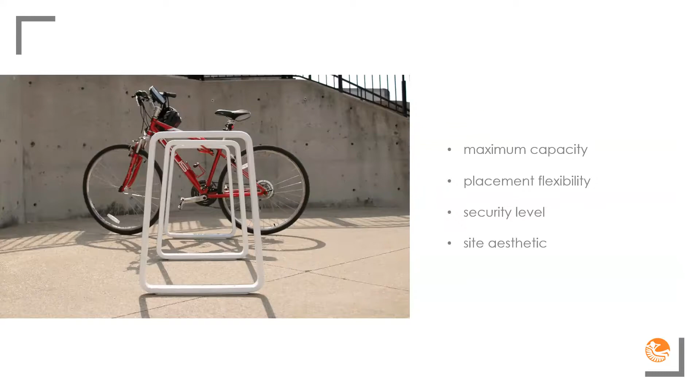Also, sturdy construction is something you're going to want to look at, especially if it's an area where theft or something of that nature is a higher concern. If it's an area where there's people stealing bikes, you might want to consider something that's a little bit more sturdy versus some of the other options. One thing that I would recommend there is installing a bike rack that can be direct buried, that is poured in concrete rather than anchored. It just gives you another level of protection and resistance to actually even breaking that bike rack and then stealing the bike after, which does happen.

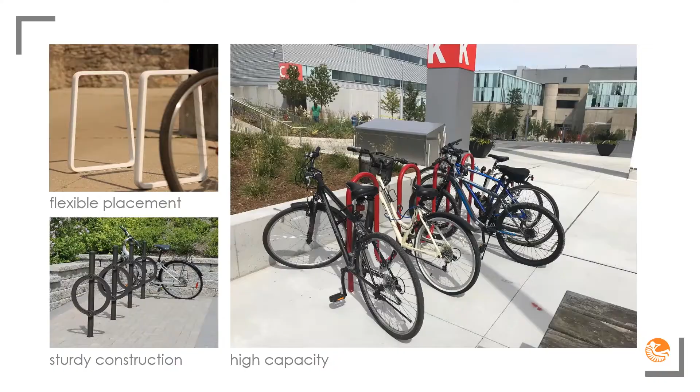So I'm going to look at actually the placements once you've selected your bike rack and you feel that it's one that best fits your needs on your site. One thing that you should always consider even before looking at these guidelines that I'm going to suggest here is you're going to want to look at your local codes. Match them first, because of course it's going to be important to ensure that you meet what they need, because you don't want to go back and change things and update them and have a whole change on site later.

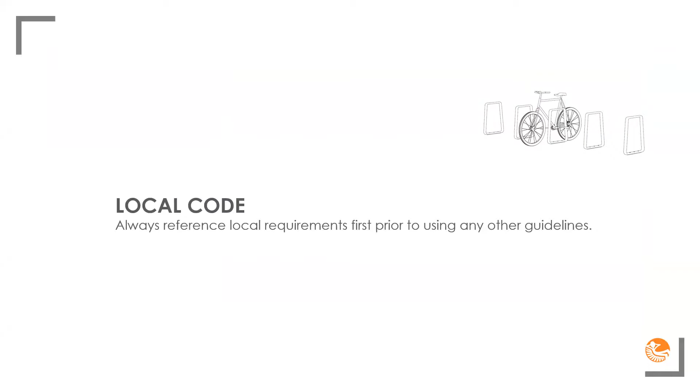One thing to consider is, as mentioned with the sturdy bike racks, theft, but that also is related to location. So if you can consider a spot where there's good lighting, some good traffic, where there's some visibility, it's a really good thing to consider when you're deciding where to place them, maybe by some doors close by, rather than in areas where they're out back or hidden or maybe susceptible where people have some time to fiddle or meddle with the bike racks and then unfortunately steal them.

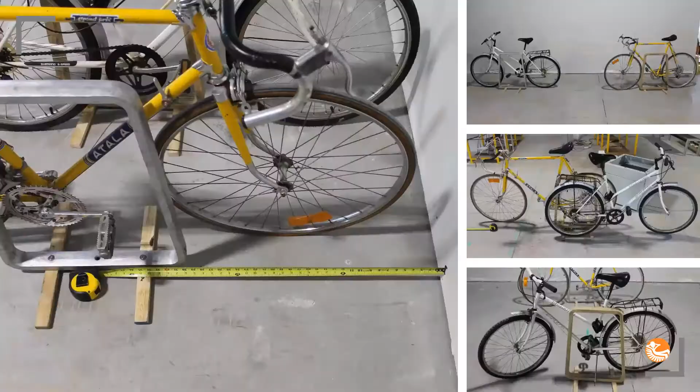So then look at the actual install locations and spacing of the bike racks. I looked at various guides and recommendations that they had. There's different dimensions all over the map in terms of what's suggested. I took all those numbers and kind of compiled them together and thought, well, I'll try those out myself at our shop here. And so I brought in a couple bikes and had some mock-ups done of a bike rack that we recently released. And what I did was just mocked up, imagining myself locking those bikes to those bike racks and imagine myself removing and taking them out just to get a feel for whether there was enough room to, one, maneuver and get to the bike rack, and then two, actually connecting and locking up. So that's what I did here.

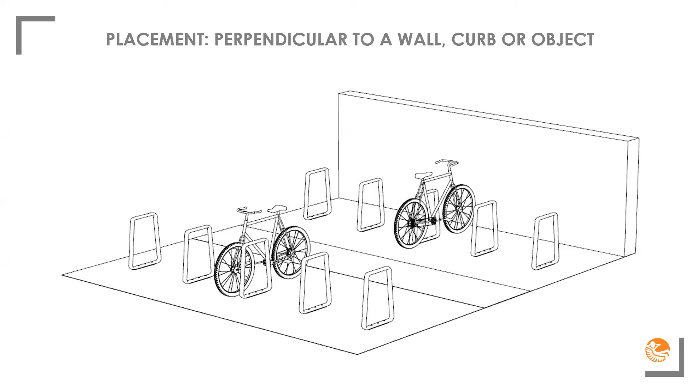And with that, I developed a guide that we can share that has some common scenarios that you could run into when you're looking to actually place your bike rack. So in this case, this is the perpendicular to wall, curb, or object, and that's depicted in this little image here. I'll get into the details here on the next slide. So what I would suggest is keeping each rack itself 36 inches apart. You can apply this to any ring bike rack or two capacity bike rack, really.

You could use this guide for a whole bunch of bike racks that might be available on the market. So that 36-inch gap you want in between gives you good room for parking your bike in place, keeping it 30 inches away from the wall or curb. It allows just enough room for that tire so that it's not overhanging or banging into the wall or other object.

And then if you're going to do two rows in parallel, I would recommend a 108-inch minimum there. That's accounting for a 36-inch gap so that people can walk in between those two rows and get to their bike, and also have enough room to pull their bike in and out of that location.

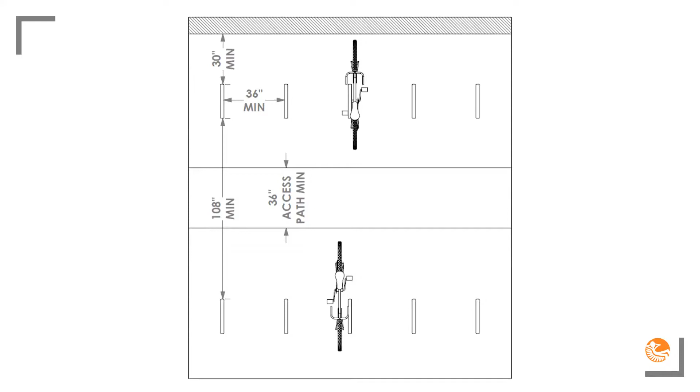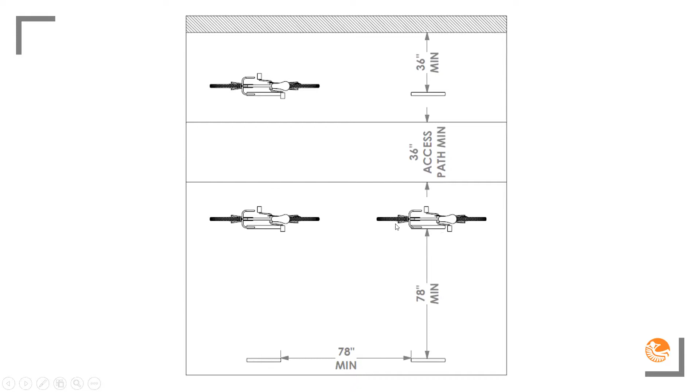And then I'd recommend a little bit more room near that curb or wall, especially if you want to account for people walking in beside their bike there. In the other instance, that would just be accounting for the wheel where people wouldn't actually have to access. So here you need a little bit more room. And then from one bike rack to the next, from edge to edge, it leaves 78 inches. This gives enough room for the full-sized adult bike and then enough room to pull out again.

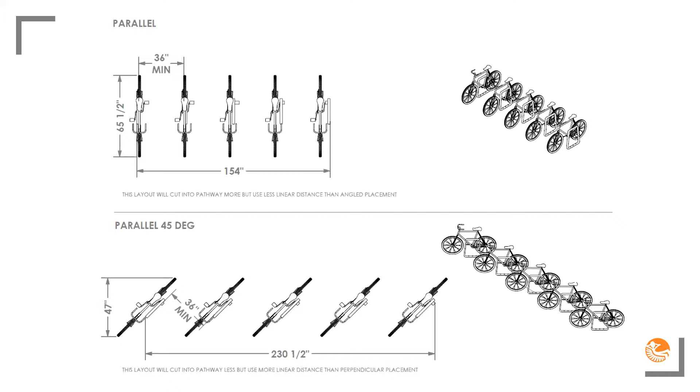But if you're looking at a walkway where you've got limited space, you might consider turning those bike racks on a 45. So you can see in this case that bike that was 65.5 inches would only take up a depth of 47 inches. Now the thing to consider, of course, is that you're now spreading it over a greater linear distance. So that could really depend on whatever is working best for your site. Simply turning it is a little tip for freeing up some space in other areas, whether it be a walkway or pathway.

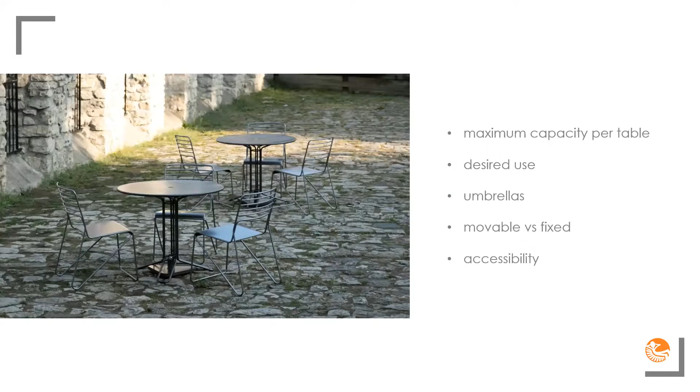So now I'm going to talk about some product function selections of tables and chairs. A few features you'd want to think about: maximum capacity per table, the desired use, umbrellas, a movable versus a fixed option, and accessibility. So when thinking about the desired use, you might want to decide what type of activity is going to happen there. Is it simply an area for cocktails and coffee, or an area where work will be done, where people take out their laptops and papers, or are they sitting down for a full meal?

Another thing you'd want to ask up front is, are umbrellas going to be at this site? Some tables have the option where you can go back later and add that if you can't decide up front, but you'll want to be conscious of that and decide whether that will be required on site.

And then in terms of movability, you'll want to consider whether you want an anchored table or one that can be moved. Chairs that can stack are great for packing away at night. There are certain courtyards and spaces that want to clean up every night or weekly, so chairs that stack could make that a lot easier and simpler for maintenance crews. So that's something you might want to consider as well.

So going back to table size and capacity, for cocktails and coffees, something like a two-person 30-inch table with 2 chairs might be appropriate for that type of setting.

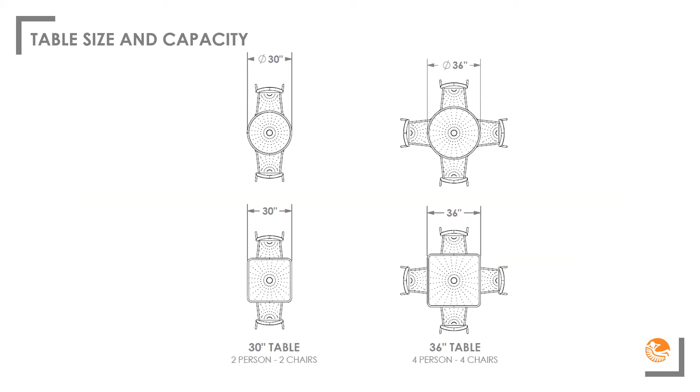Whereas if you're thinking that maybe it's a sit-down meal, you might want to look at the 36 inches where you can actually have 4 people and 4 chairs. Another thing to keep in mind, here we're showing a 30-inch diameter and a 30-inch width. The square tables will afford you a little bit more room in terms of square footage if you're looking at the exact same dimension. If you need more room and you prefer the circular shape, I would then select maybe the next size up to account for a little bit of additional room.

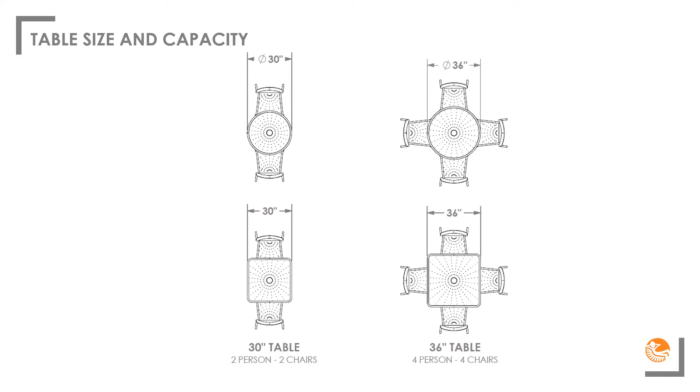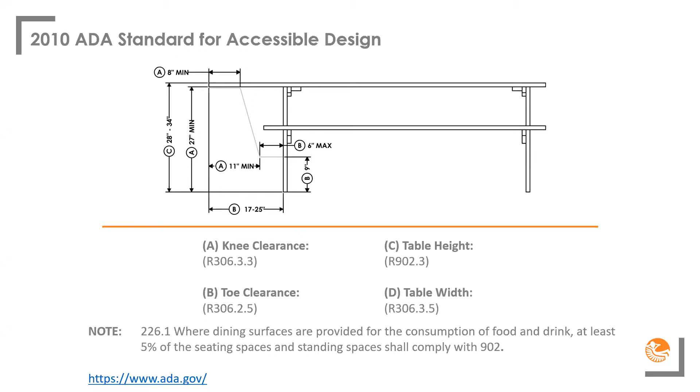But you want to ensure that there's 27-inch clearance underneath. The table height is between 28 and 34 inches. And then all these other dimensions are accounting for the toe and knee clearance. And those references you can see there are the sections that you could pull up if you'd like to look at those yourself. And we get asked about this so often that we actually have a guide that makes a little visual and summarizes it a little bit better than having to reference multiple sections within the ADA guide.

And then we also paired that with our models that we know match. So that's something you'd want to keep in mind, regardless of fabricator. Not every series or style of table will likely have a table that would work for these dimensions. So you want to keep that in mind. And some do a better job or might have a bit of a different aesthetic that you're after. So you want to verify and cross-reference something like this to ensure that it fulfills the dimensions.

So ADA is one guide. GAATES is another organization. It's the Global Alliance for Accessible Technologies and Environments. They're very similar in terms of what they suggest for toe and knee clearance and table height. The one big difference is they actually recommend 20% of the tables for each public outdoor space be accessible. So by all means, if you're just looking to fulfill the ADA, that might be adequate from the legal side, but you certainly can consider going above and beyond by following some of these other guidelines and having some extra tables. And often these tables are just as good for anyone to use anyway. So why not bump it up and add a few more?

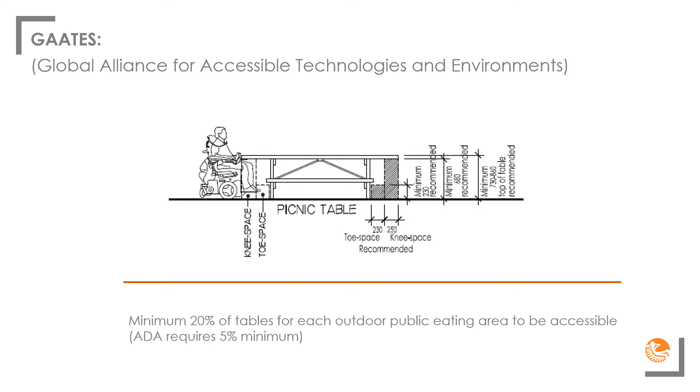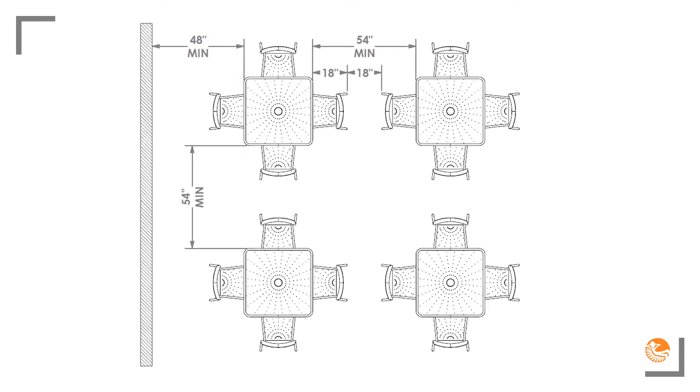You can see where that 18 inches is noted. You can pull out your chair and still get out, and then you would need to tuck your chair in if you want to get through, because if you left it out, it would still be very difficult. So this is a minimum, and I'd say the most dense you would want to make your tables and chairs. If you have the opportunity to have a little bit more room, I would suggest spreading your tables out at 72 inches minimum from edge to edge. And that also accounts for leaving a 36-inch minimum access route. That's also great if you're thinking about the ADA tables, since you're leaving a pathway for people to get in and out. And again, this is a minimum.

The 18-inch dimension there is only accounting for if someone's actually sitting at it. I would leave another 12 to 18 inches on top of that 72 if you want to have it so that 36-inch access way is maintained while their chairs are out. So that would be even better. If the space provides that amount of room for you to spread it out a little bit further, by all means, I would do that.

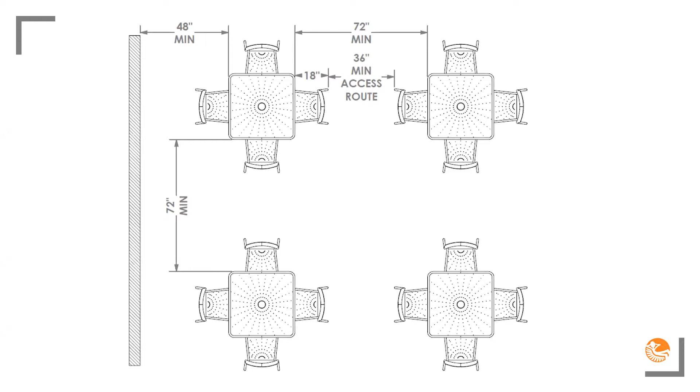Of course, this is all more critical when you're putting in a fixed installation. If it's movable, you can just slide it and adjust it as you go. But if you're anchoring or doing a direct burial installation, you'll want to decide that beforehand because it will become permanent. And then, kind of like the bike racks, just turning them, you get a little bit of a different relationship between the tables. This would be more important, again, when it's permanent.

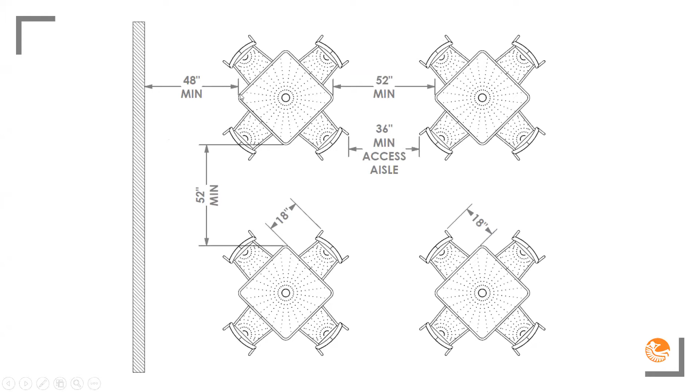You can actually tuck your tables in a little bit closer, but it'll still maintain that 36, just because in this case, the square ones, the chairs would typically be in line with the one side there, so they can tuck in a little bit more, and then you can bring your tables in a little bit closer. Oh, and I would also mention that if there's a wall or other structure in the way, I would leave about 4 feet on the side there. You can see that noted.

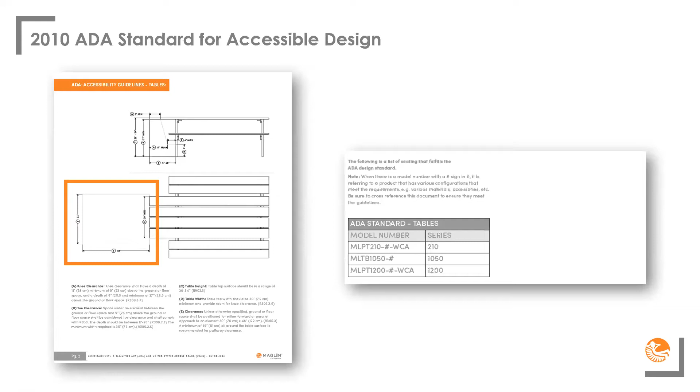So also you'll want to consider the other dimensions—those showed the actual proportions and dimensions of the table itself, but you want to look at the area that's clear in front of the table. That same guide that I was mentioning earlier is pointed out here. So you won't want to put anything in the way there.

That's the area that the wheelchair can then access. ADA also outlines what is required, and this is again the minimum of a 30-inch width where they would approach the table, and then a 48-inch depth. You'd have to keep that clear. That's section 305 if you want to look that up in the ADA guide.

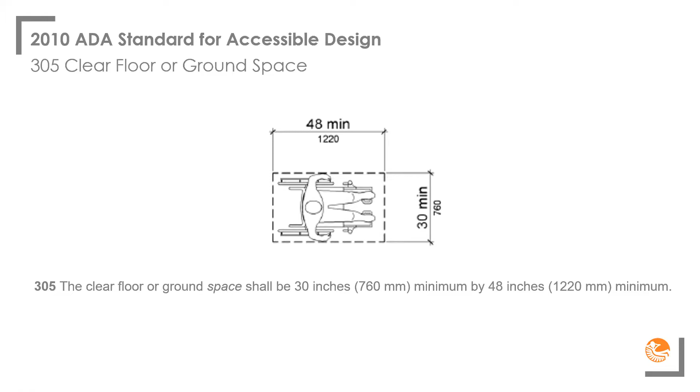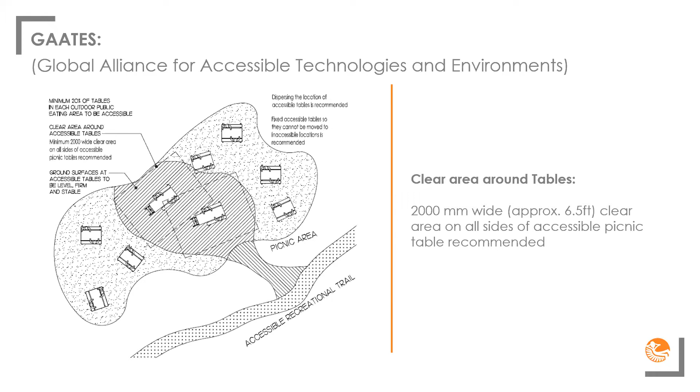As GAATES was mentioned earlier, they have a little bit different approach—in this case they actually suggest a minimum of a 2000 millimeter clearance all around the table. That works out to about 6.5 feet. That can be really good just for allowing access to the side where the accessibility may be if there's only one side that it can be accessed. They also suggest having a firm, stable, level ground, which makes sense because getting to that location will require them to wheel up their chair. So anything that can be done there to improve the accessibility to that table is a great thing to do.

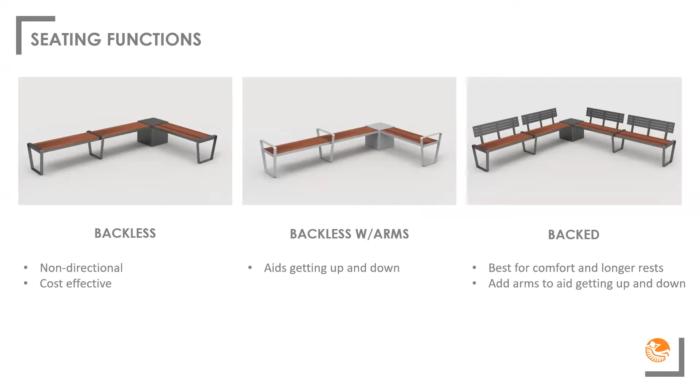Now I'm going to talk about the product function and selection of benches. When you're looking at benches, you'll definitely want to consider the functions that it offers, its accessibility again like the tables, and the seating capacity. Looking at seating functions, most benches typically get lumped into one of these groups or have these options: you'll have your backless benches, ones with arms, and backed benches.

The backless benches are great for areas where there's no direction—they're non-directional. So if you're in the middle of a pathway, they can be accessed from both sides. They're also very cost effective typically because they don't have extra material to have the supporting back, and if they're armless as well, there's typically a little bit less material. So if you're looking to get a lot of seats for the least amount of money, that might be something you want to mix into your site.

Adding arms to those benches helps people get up and down out of those seats. So it's great to have a few, especially for those with mobility issues or the elderly—it can certainly help just to have that arm there getting up and down and into the actual seat. And then if you want to add a little bit more relaxation and rest to the seat, where people could sit for maybe a little bit longer, you could then add some backs to those.

And then you could also conjunction that with arms too as well, so it helps them get in and out of those seats.

I just want to touch on this. This one comes up every now and then, every few months. We get someone well-intentioned trying to match a bench to ADA Section 903. I just want to point out, this does not apply to outdoor benches. It's only applicable to sauna, steam rooms, dressing, fitting, and locker rooms, holding cells. I've actually contacted the ADA about this, and they've clarified that no, it indeed does not apply to outdoor benches. So it's not written into law.

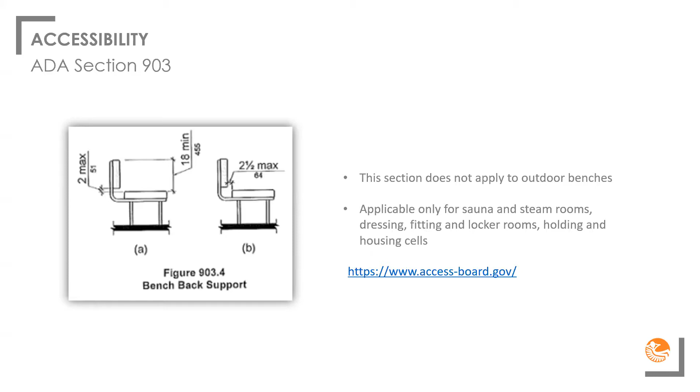Now, there is also the United States Access Board. So these are some suggestions to add to your site in terms of benches. These guidelines aren't required by law, but they are recommendations. What they suggest is a 17 to 19-inch seat height. That is very common—you'll find that most benches match that height. They also suggest having benches with armrests, which they suggest are most useful, as well as having back support. So you can go to that link there, and there's the sections that are referenced.

We also have that paired with our ADA guide, so you can see those dimensions marked out there, and you can then compare to benches. We have a list of our benches that are compatible with that. You could of course use that guide to reference any other brand or company too, and see if it fulfills those guidelines.

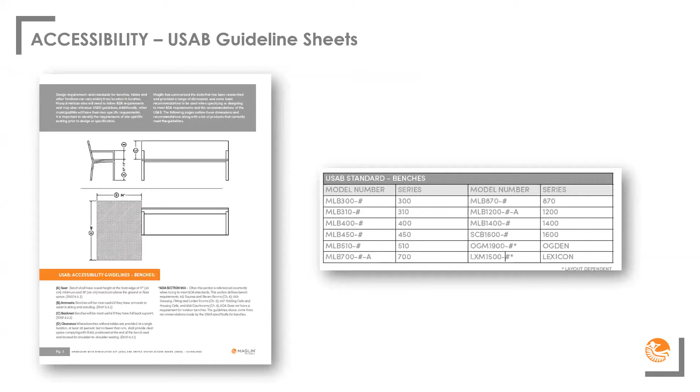When talking about seating capacity, what I've typically done in the past is allow 24 inches as a space for one person. That's enough for the person plus a little bit of elbow and breathing room, and I'd count that as enough seating room for one person. If you do that twice, you've got enough for 2 and 3 and so forth, if you want to count seating capacity.

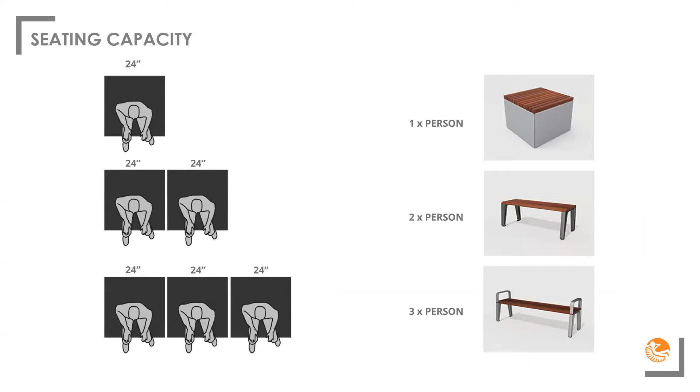Now I just want to talk about an application, what that actually looks like. That's great if you're talking about family and friends—they're going to fully fill the seating capacity. They'll sit one by one right beside each other, and you could count one seat per person.

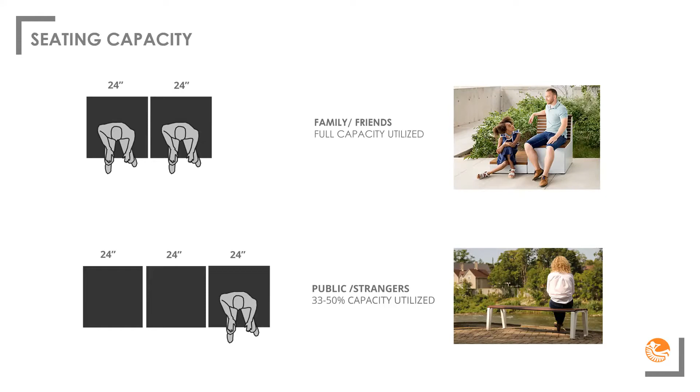But if it's a public space, or a space where there's expected to be more strangers engaging the seating, you might want to consider it more at 33 to 50% capacity, because typically we see that if there's a stranger on one 6-foot bench, people will avoid that if there's another seat around and go to another bench. So if you're trying to get a metric on how many benches you need to spec for your site, think about what type of people will be sitting at it.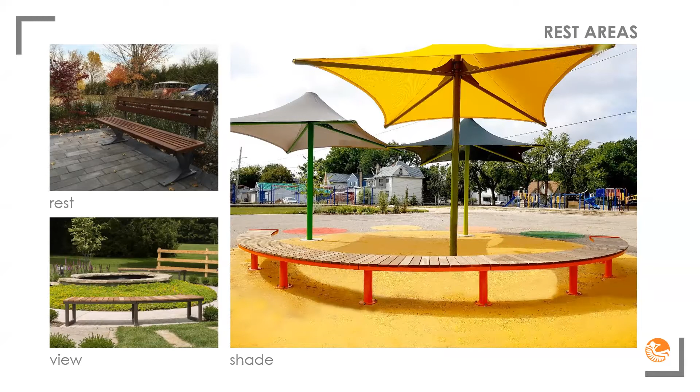Also, you want to consider spreading benches out evenly. If it's along a pathway, providing a reasonable increment of rest is great too, so that people who can't walk as far have that extra little break in between distances. As mentioned, I was talking about rest and the view—if the site requires it, or it's a sunny area, or you need a break from the sun, it's great to consider shade. That could be either from vegetation or structure, and you might want to consider where that bench gets placed, because it can make the seating experience all that much more enjoyable depending on where it's placed.

So I want to talk about GAATES and the placement of benches and what they suggest. They have a couple different pointers. Same as USAB, they recommend having armrests and backrests, but they also suggest having a clear ground floor area next to the bench to accommodate people who may require mobility aids, service animals, or strollers. So this is a few more things even beyond just the wheelchair.

They have this image here, and the link is down below, where they suggest having a bit of a pad beside the bench so that someone in a wheelchair could wheel beside, or if you think about someone with a stroller or a mobility aid, they might want to pull those up beside and be able to sit on the actual bench. So it's really a multi-use, multifunctional space that's great to add.

They also suggest having the arm removed on that side too, in case you're mobile enough that you want to slide and sit on that bench. And then if you put the arm on the opposite side, you're also fulfilling the need for people who need that to get up and down. So it's a versatile way of setting up a seating section.

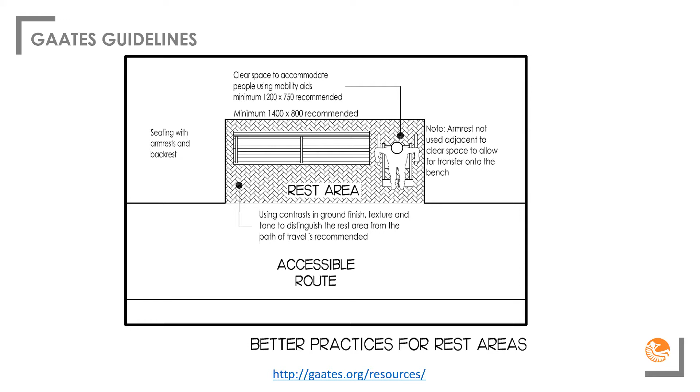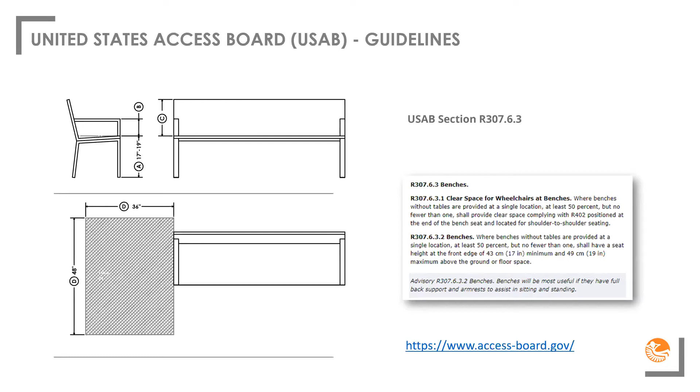And as mentioned, the USAB also suggests having a clear space beside, just like GAATES there too as well. They have a 48 to 36 inch recommendation. Again, this wouldn't be law, but it's something they're suggesting people put in. At some point it could be a requirement, but as of now it's a guideline, and I think it's a good guideline to reference.

So when thinking about configuring furniture, it can really depend on the social setting you're trying to create. Depending on where you put your seats and how you spread them out and orient them, you can create individual spaces where people can have their own private messaging sessions or phone calls, or with a bit of privacy in between, it gives them a little seclusion rather than being out in the open.

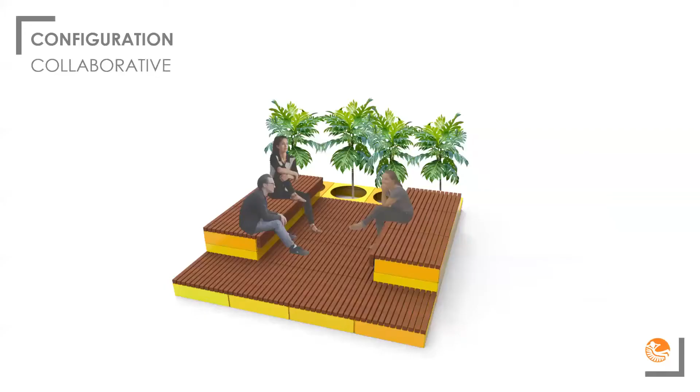Also, if you're thinking about collaboration, orienting seats towards each other is a great way to intentionally facilitate that, where they can face each other and have a discussion. It's just a simple way of facilitating that, all by turning the seating in a certain orientation.

And of course, when you're placing tables and chairs, people typically will do a C shape or look towards each other so that when they're having a conversation they can look at each other. So if that's something you want to implement, you might want to think about where you're placing those benches so that it affords that opportunity for people.

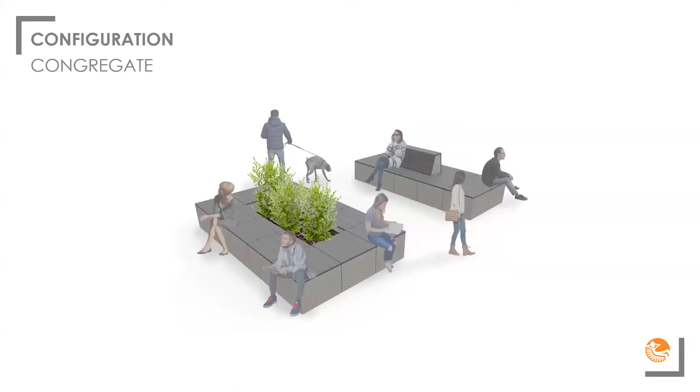Then the last type of social interaction we could talk about is areas where people can congregate. You've got strangers, but they're still out together sharing time in the open, kind of in their own world, but still enjoying the open public space, with the people, but still by yourself. You can see that in this practice here, right? People are turned away from each other, but they're still enjoying being out in the open public.

So you might want to consider how you're placing seating like this if you want to encourage something like this or provide a nice open square where the public can mingle together.

Also, it wasn't mentioned yet, but a lot of what was shown would be typical off-the-shelf things. We see many different custom projects where they're actually adapting the product to their site, or it's very integrated. By all means, talk to your manufacturer about that and let them know what you're doing. There are many opportunities out there to tailor specific benches to your site if that's something you're after.

So I'm going to talk about the details for a second here before showing some examples. Here's a quote I love by Charles Eames: 'The details are not the details, they make the design.' I'll show that in this case here.

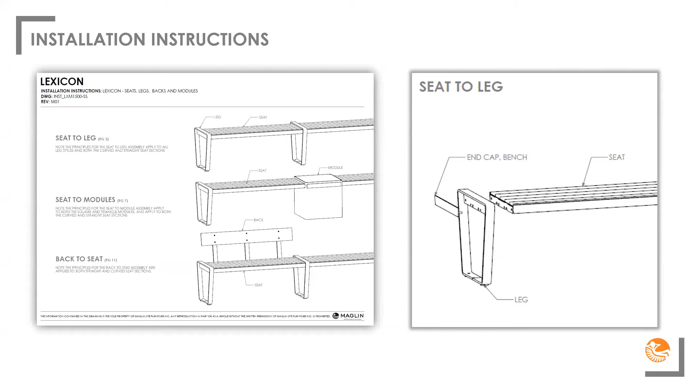And maybe sometimes too, it requires a follow-up to site, and just making sure that all those components can get put in place, especially if you have a large bench or something that's going to be assembled on site. That can be more of an issue versus something that's already pre-assembled, for example.

Hi, Clayton. I've just got a question in relation to the ADA considerations that you've brought to attention in the previous few slides. So, in your experience and opinion, based on those recommendations, would you recommend selecting a product that has been specifically designed to accommodate people with disabilities, or mobility issues, I should say, or just generally allowing for more space around products that have been spaced around the site? Do you have a recommendation on that?

I think some products certainly do a better job than others. I don't know that you need one necessarily specific to it. I think if they fulfill the requirement, they could certainly still be beneficial as long as you have that knee and toe clearance, and then you've got the width. And in terms of spacing, I would definitely recommend always having that space, because I think that's absolutely critical, right? When you want to get in and out, if the site affords that opportunity.

So, yeah, for sure. No worries. Keep on going. Thank you.

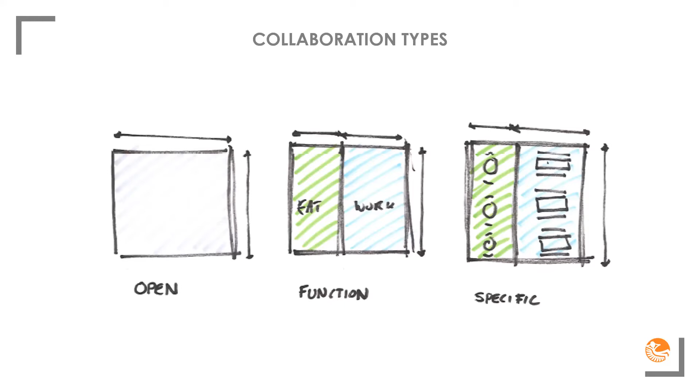Thanks. So I just have a few collaborative examples here. Oftentimes we have customers who have various site requirements, and we can categorize them into these three groupings. There's the open-ended, where someone might have a certain set size of space, and they don't have any specific goal or intention just yet, and they want us to put some site furnishings in that. The other is they might have an idea of what functionally they want to get out of it, like an eating and working space, but they haven't picked the product, so it's just the function that they know. And then we have others that are very specific, and they just need us to help with the final details in terms of getting spec drawings and making sure that it fulfills their budget.

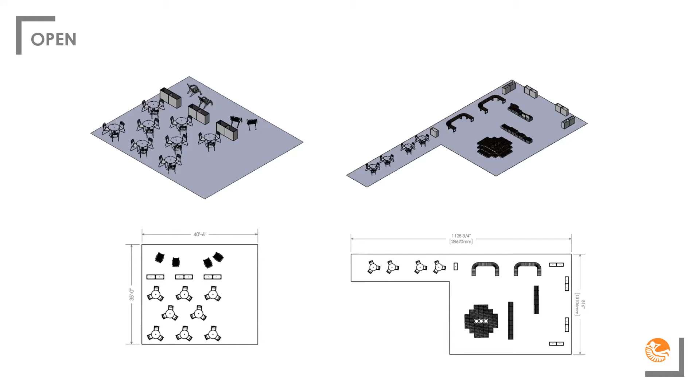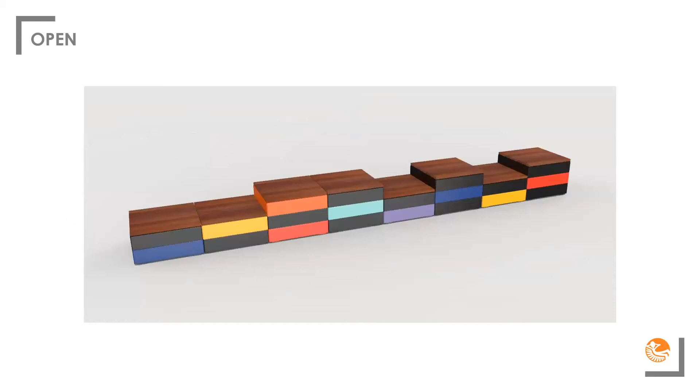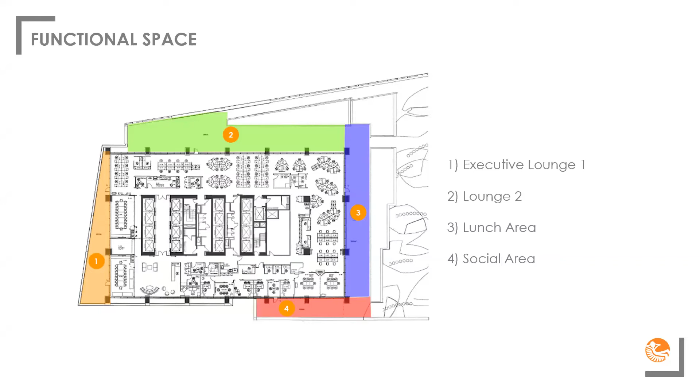So in the case of working with functional spaces, this architect came back and they wanted different spaces for lounging, a lunch area, and a social area. But they didn't really have it narrowed down to what type of furniture, specifically what kind they wanted in those spaces, and were looking for some suggestions. It is a bit of a unique shape because it is sort of this wedge shape, so trying to keep an access way in there was a little bit tricky.

But what we ended up coming back and suggesting was these two-person tables and then a few benches in place there too. And then you can see maintaining that center section clear. Also in the second lounge, we did a very similar layout as well. A little bit of an open section and then the tables and chairs on the outside.

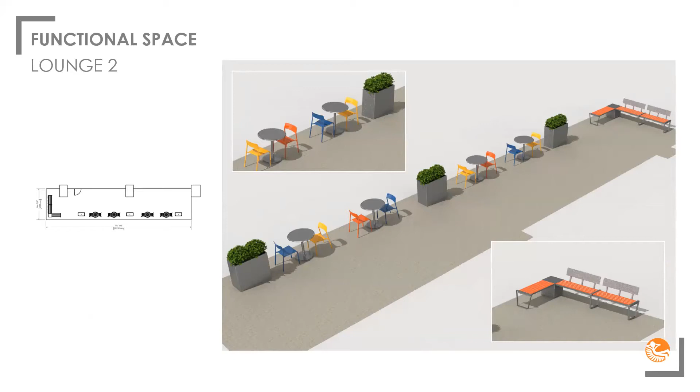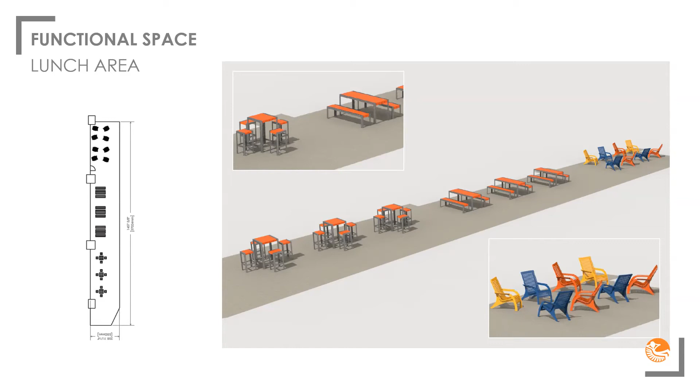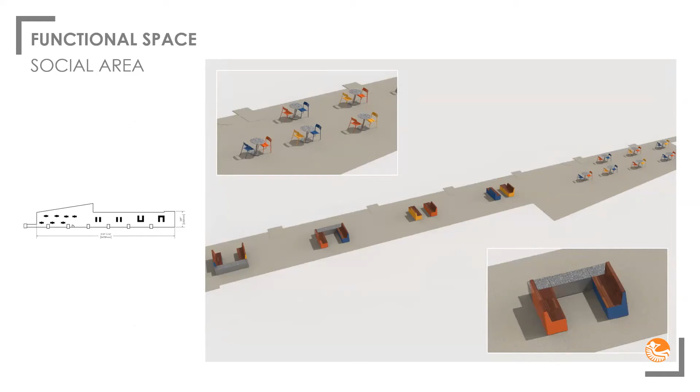And then for the social area, we had some U-shaped bench sections suggested. So kind of going back to earlier when you're trying to facilitate those areas that are good for, say, discussion. You know, in this little nook here, you have a group of people and they can face each other and have some conversation and just relax. And there's just an example, if you can see those tables and benches, which are providing a lunch space for people.

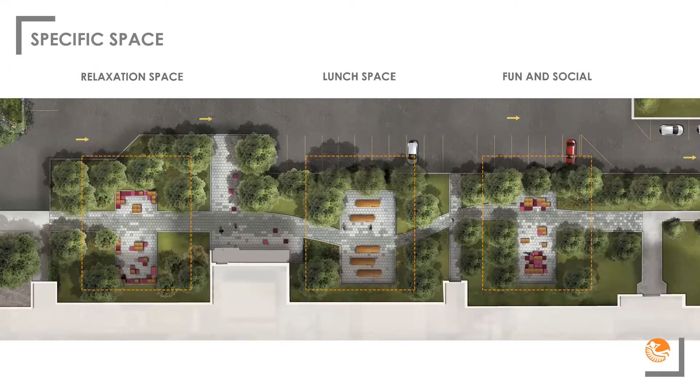And so in this instance, the landscape architect had a very specific goal in mind, and they pretty well laid everything out and knew what they wanted, but we helped come along and worked with the presentation and helped them fulfill some images and presentation materials for them, and then worked with their pricing as well. And so they had this relaxation space, and going back again to earlier, you have these different zones where you have little private sections where people could just enjoy their own time and sit and rest and have their little corner to enjoy.

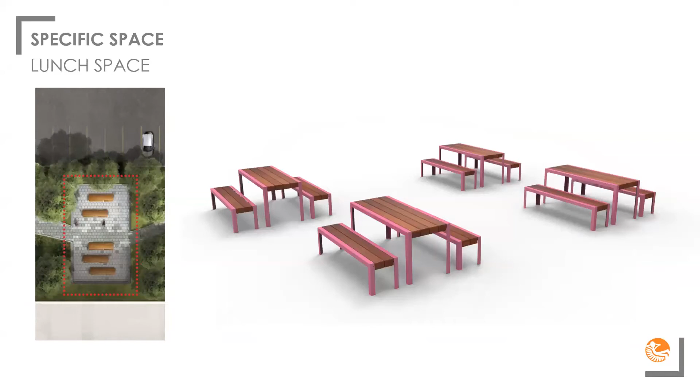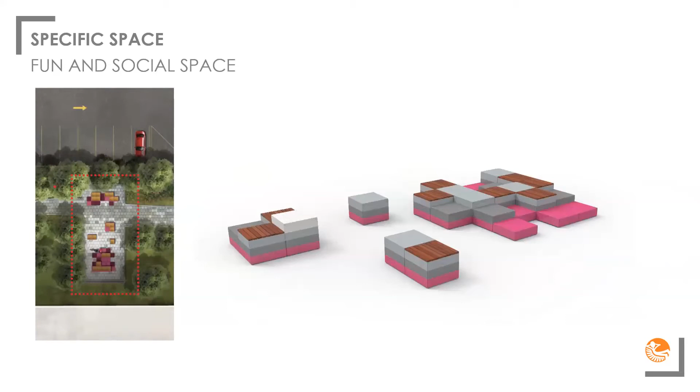And then the lunch space, same tables that have come up a couple times now. They wanted those on their site where they could have an area that they could pull out their lunch, and it gives ample room to pull things out and enjoy and sit and have a lunch. And then they wanted a fun and social space as well, some area where it'd be kind of interesting to climb up on and different positions and spots you could sit on, and just be a little bit more dynamic.